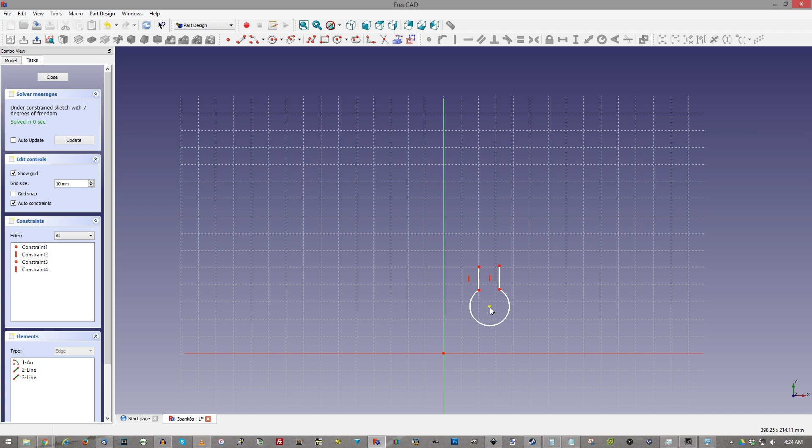With this design, I'd recommend using very small lines initially for the center designs, because things can scale up easily but not scale down easily, that's what I've found when designing any part in FreeCAD. Make sure you can scale it up and don't have to scale it down much. It's okay to scale down a little, but if you have to scale down like twice the size or half the size, you'll run into a lot of problems with circles and things just freaking out and not even resembling their form or shape.

So I digress. Now what I want to do is create basically 3 of these circles, and of course lines connecting all of them, creating a singular shape. So I'm going to create the center circle type shape.

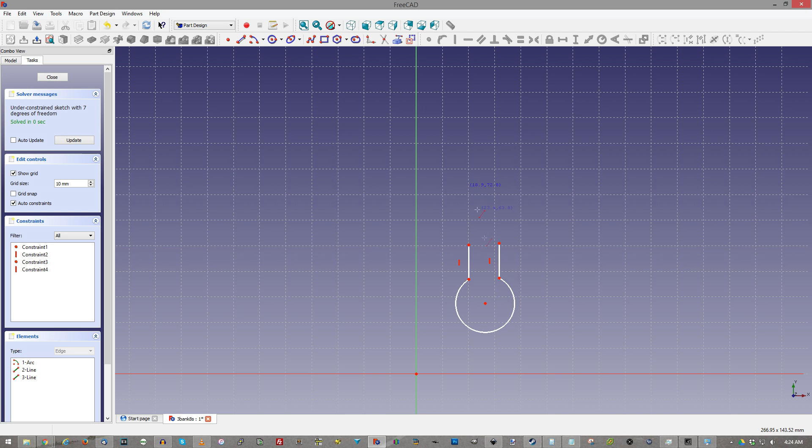Of course it's going to be 2 of these arcs, and unfortunately through normal circumstances I would have to define the center of each arc, this little dot here, twice. But if we take a line and hit this blue key here, you see all these tools have changed to blue instead of white. You can create a line like I've done here.

As you see, this line is blue, which means it's not going to show up or be visible outside of our view here for part designs, and of course it won't be visible for the actual model itself. So I'm going to go ahead and create the arc, and I made sure this line, or the point for the line, is yellow, and then I click this side here, make sure that's yellow too, and there we go. Now both the center points are bound to this axis by default.

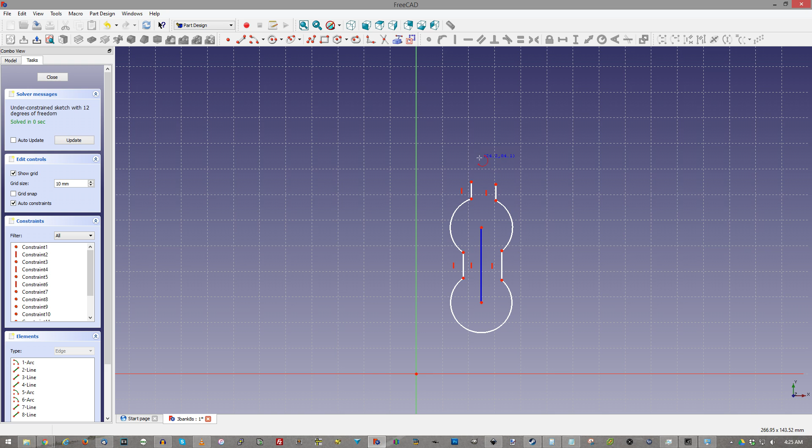I can move it around freely, so good to go. Now I'm going to go ahead and create our third and final circle, and hopefully my tiny line rule will work. Last time it was a total fail, unfortunately.

So click our blue again. I'll show you another example: say you screw up, you didn't click that button, so it's not blue. It's easy, you just click the line or whatever element you want to convert, and then you just hit this button, and there you go. It just turns blue, easy as that.

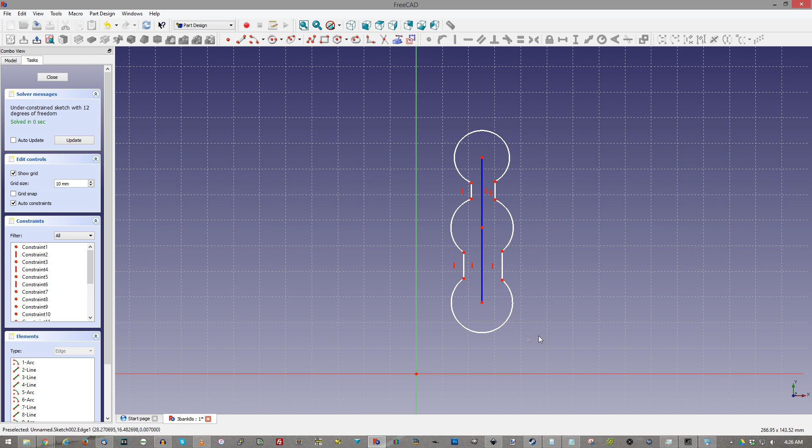Now I'm going to define my radius here, which is going to be 6.5. And I want all 4 of these shapes to be exactly the same. I'm going to manually define these sizes real quick. These are a little too big for my liking, so I'm going to change them.

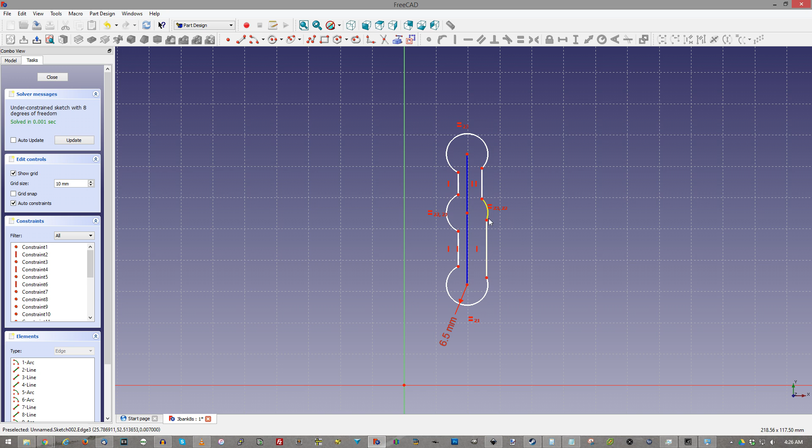Now in my case, I want to manually scale it because when I didn't do this, it just freaked out, did crazy stuff like that and would lock up. This program is very buggy, and if you don't time your constraints or order them correctly, the entire sketch will lock up and you'll have to revert back to a certain point or just scrap the model entirely and redo it like I had to do.

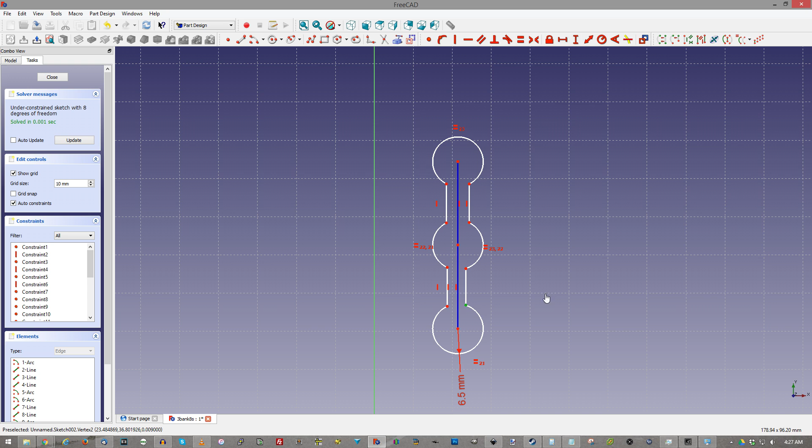Hopefully not going to run into that. So now that we have our sizes here, it should just be a matter of, actually first what I'm going to do is make these symmetrical.

Fingers crossed. Oh, actually, so I'm going to define these by 8. Okay, sweating bullets over here. It's nothing, all right, okay.

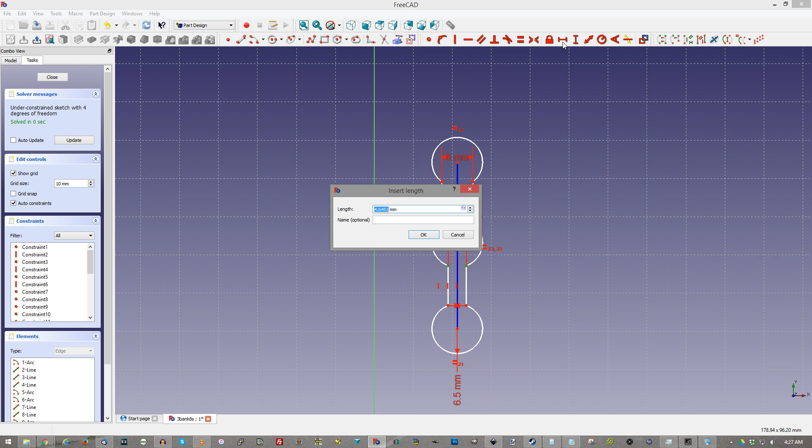Now that we have the hard part out of the way, I want to make these point-to-points 22.5. I'm just going to equal these out because it's the same exact thing. Okay, so now we have our shape, and now I can stick it wherever I want.

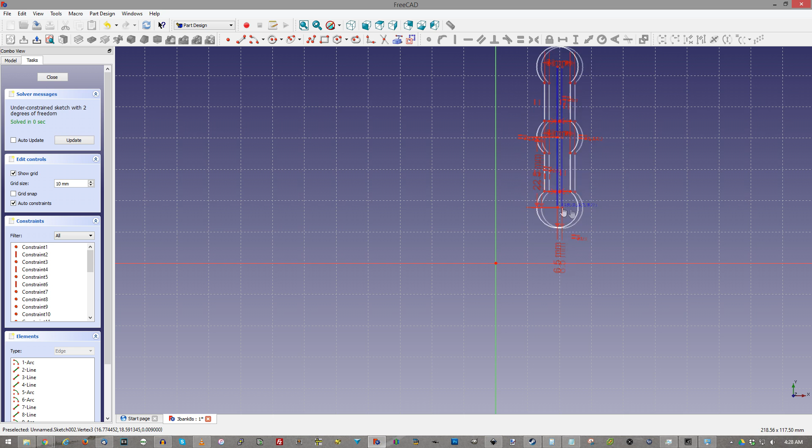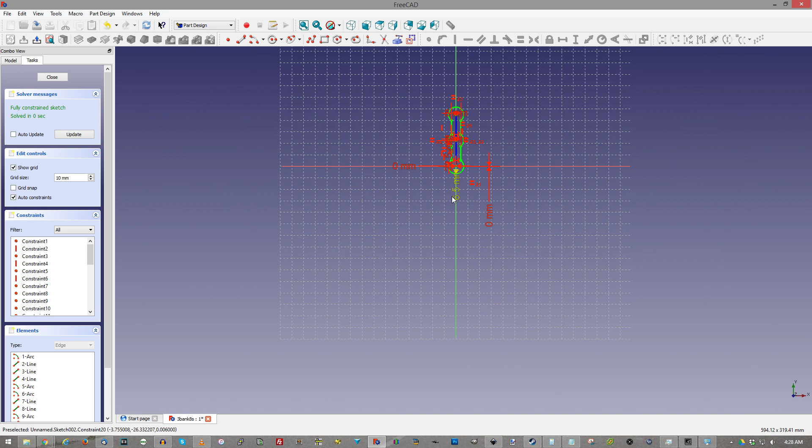So for the time being, let's see here. Right now, let's deselect that, hit this lock button. 0. Okay, so I'm going to stick this here, just to make it easy for me when I go back and edit this. So now we're good to go.

So we have our piece. Now let's go ahead and toggle the base in which we are going to assign it to. So we have it there, that's fine.

Okay, so now I want to go ahead and map that sketch to the surface here. So I click this surface, make sure you deselect it first, and then just click it. Don't click it from the left. Click whatever actual surface area you want to map this to.

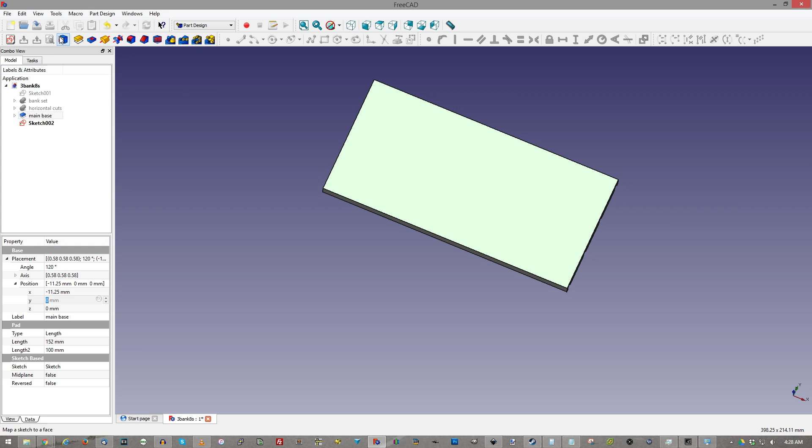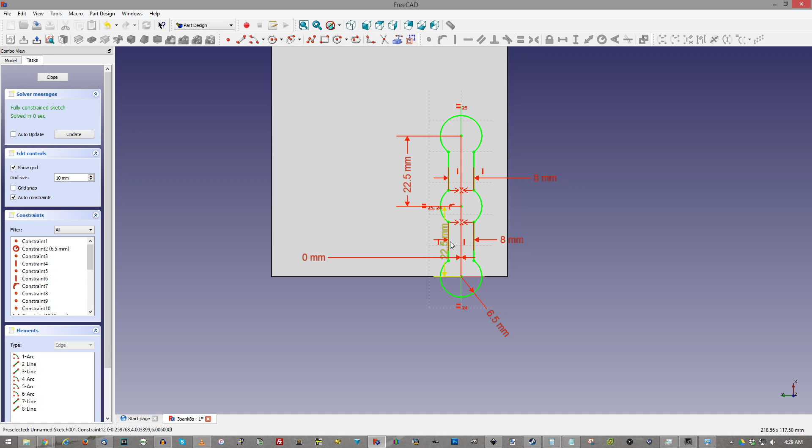So now I'm going to click map to a surface, sketch 01. Where did my scalings go here? Oh, here's one. Of course, it kind of screwed me and moved it wherever it pleased. Now, where's my other 0? That's my other 8, another 8. There should be another 0. Where the heck is it? FreeCAD, what are you doing to me?

Alrighty, folks, so I went ahead and figured it out here. Now, of course, I have the goal piece I want to combine everything with. However, I'm not going to use that because it creates a lot of issues. So I've created just a standard cube, no modifications to it whatsoever, just the same exact dimensions and the same exact placement.

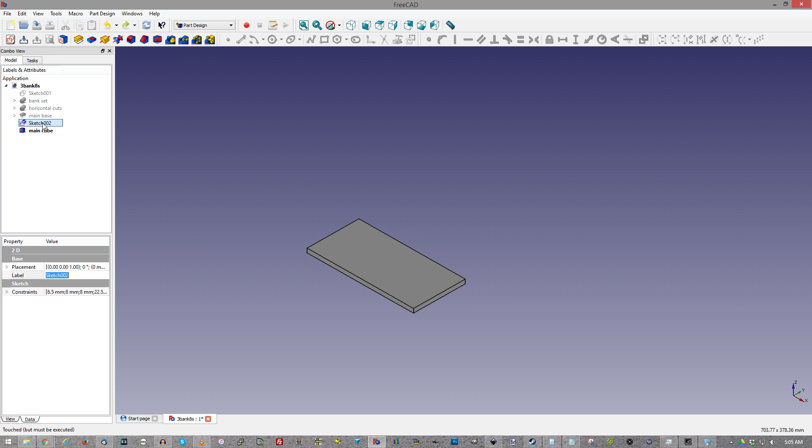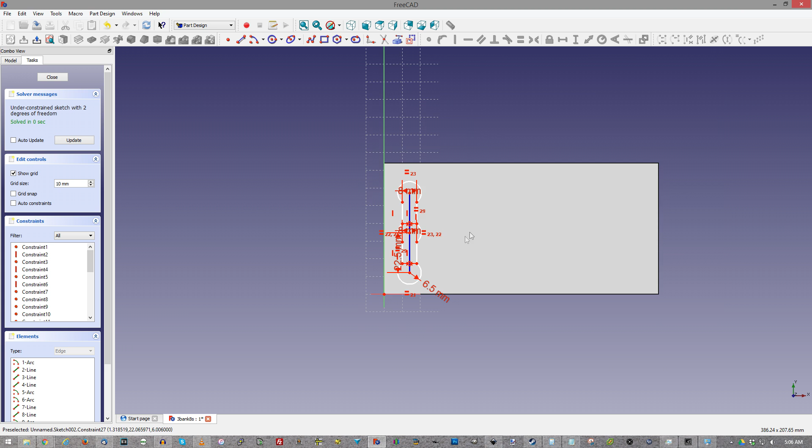And then we have our sketch here, so I'm going to go ahead and attempt to map it here. There we go, should work in practice. There we go, so now it's at the correct rotation. Previously, when I tried to bind it to the other shape, or actually the other pad, essentially what it was, is it was freaking out and rotating this, which is impossible to rotate properly without extremely modifying this model here, or the sketch. So I wasn't going to do that.

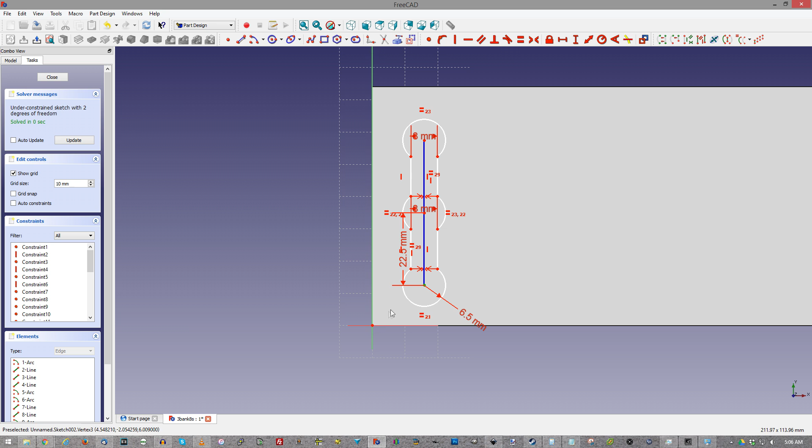Okay, so this is 14.5. That looks about right there. Yeah, okay, there we go, perfect.

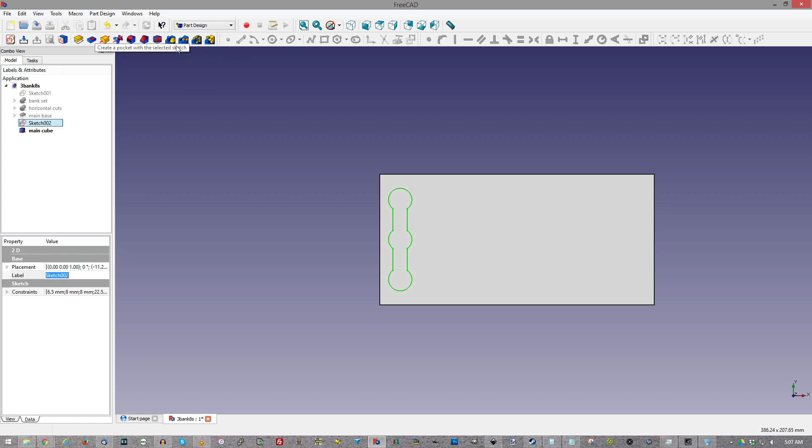Of course, the reason we went ahead and assigned that sketch to this, mapping the sketch to the face, is to do a pocket, and then of course a linear pattern. So I'll go ahead and show you, I did this in a previous episode. I'm just going to go through all, hit OK, punch OK, and then we do our linear transform.

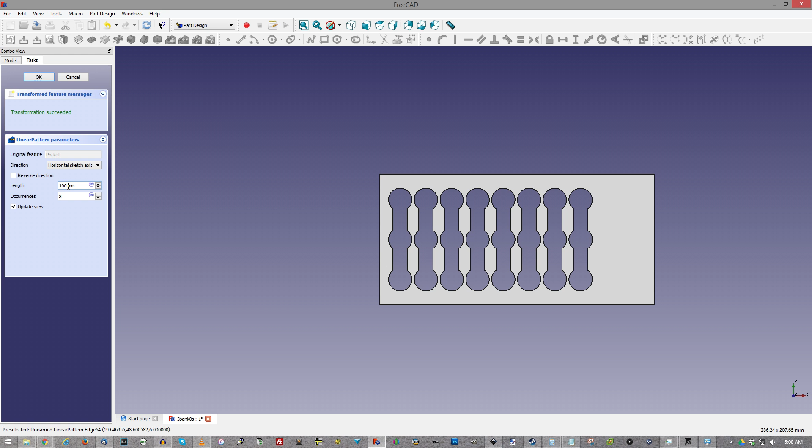We're gonna do 8 of these bad boys, and then of course 18.5 multiplied by 7. Of course, 18.5 is the 18650 cell, so this has to be 129.5. There we go. Of course, how we get this over is we have our main base.

We're going to select these 2 objects, and then we're going to go to part, and then of course we are going to do one of these here, this bad boy, intersection. So there we go, we have our intersection here.

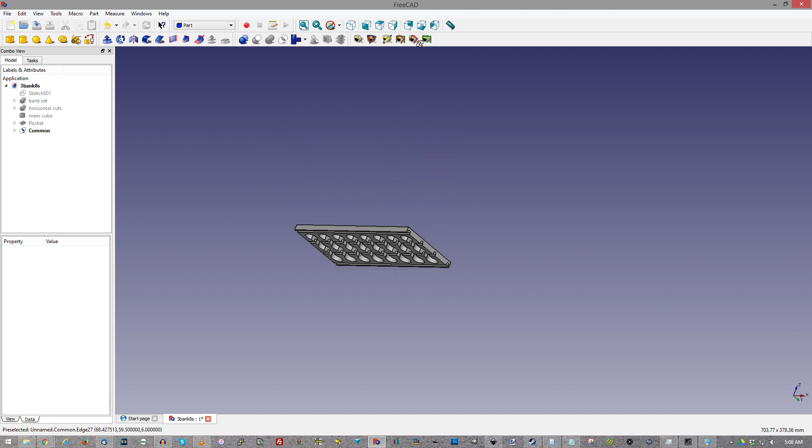Now all the other stuff is pretty much stuff I've covered before. I just have a bunch of other cutouts and whatnot I have already added into our shape here. So I'm going to go ahead and toggle those bad boys. Those are going to be other cutouts.

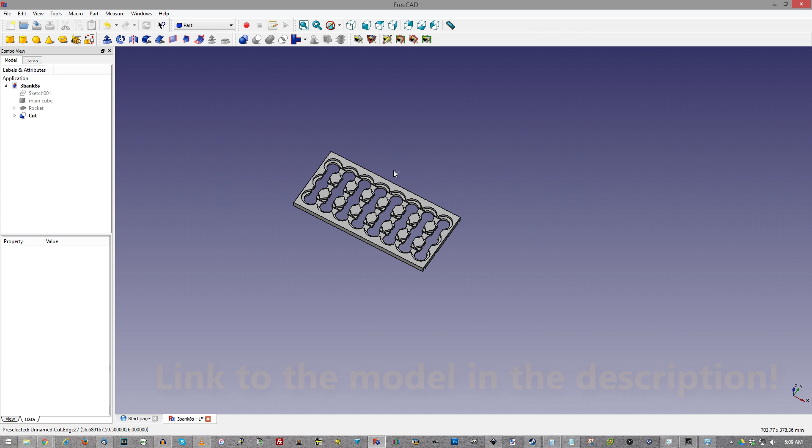Okay, is it going to work? Yay, it worked, so there we go. There's a cool little battery holder. Now, as you can see, there's just some cool little interesting cuts and whatnot I've done to it. So there we go, that's pretty much the whole extent. So there's my cool little battery holder.

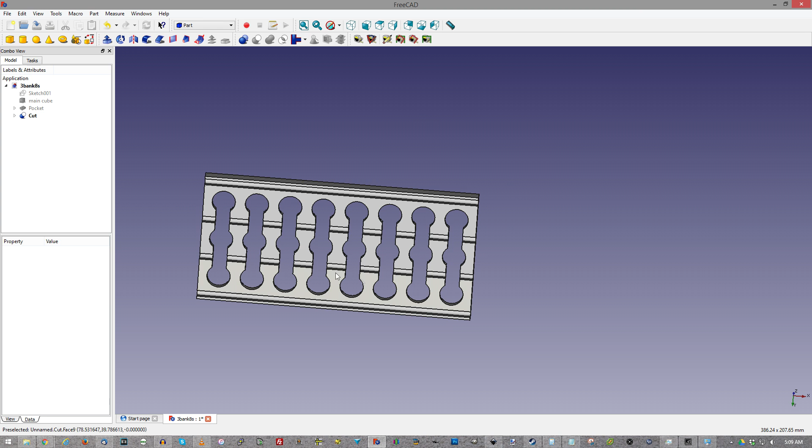Of course, we just got this shape and multiplied it so we wouldn't have to repeat it. Unfortunately, it probably took me longer than it would just be to create little circles and squares, but it does make the model a lot less complicated in terms of structure. Hope you all learned from my trials here of getting this particular thing to work.

Like I said, I'm just going to do a few details. I just wanted to show you all those particular steps.